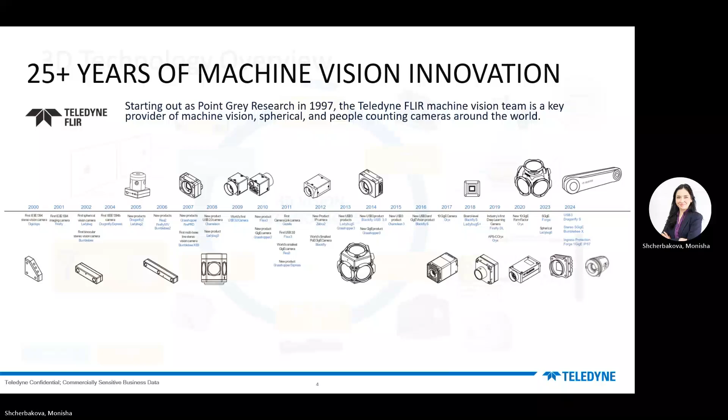There are several different types of 3D vision technologies available, and which one you go for will depend on your application needs and conditions. They can be broadly grouped into two categories: passive and active stereo. Passive stereo uses two standard area scan cameras placed at a certain distance apart, and the concept of parallax and disparity is used to calculate the depth of the object.

Active stereo has several different forms: laser triangulation, time of flight, structured light, and LiDAR. In laser triangulation, a laser is projected onto the surface of the object, and the image of the laser is projected back on the sensor. The displacement in this image gives us an estimate of the depth of the object.

Time of flight, as the name suggests, calculates the amount of time it takes for a beam of light to strike the object and travel back to the sensor. Structured light cameras use a pattern projected onto the scene and capture this pattern and estimate the depth using the displacement of the pattern, similar to triangulation. LiDAR systems send out multiple pulses of laser onto the scene and use the concept of time of flight to estimate the depth.

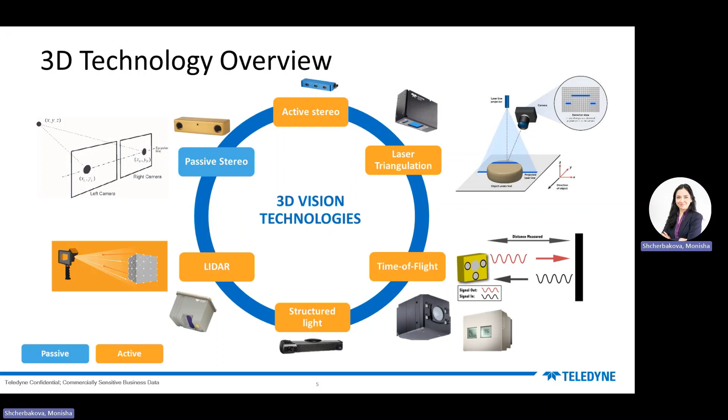So now that we know the different types of 3D vision technologies out there, I want to dive in a bit into why stereo vision specifically is important to certain applications. Passive stereo cameras mimic human vision. Like the human eye, two cameras provide depth perception and spatial awareness, along with contextual information with color and texture.

Passive stereo is also capable of high-accuracy depth measurements using precisely calibrated parameters around many points. Unlike certain types of active stereo, passive stereo is robust to lighting variations, texture patterns, noise, and surface reflections.

With certain high-performance stereo cameras, you can build a real-time system with hardware-accelerated stereo matching suitable for rapid decision-making and responsive control.

The range of distance that a stereo camera can see depends on its baseline, which is the distance between the two cameras. The bigger the distance, the longer the working distance. Using passive stereo, you are able to see over a long range and up to further distances that match human vision.

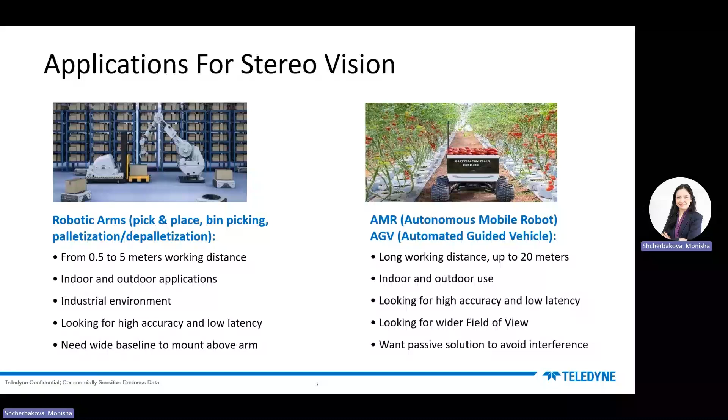As I mentioned on the earlier slide, robotic arms have a few different uses. In bin picking applications, the camera is mounted above and finds the location and position of all the parts in the bin to guide the robotic arm on where to go.

In palletization and depalletization, usually the camera is mounted above and finds the position and the size of the pallet payload to be able to instruct the robot on how to pick up and drop off the pallet.

In pick and place applications, similarly, the camera is mounted above and finds the position and the size of the object to be able to pick it up from one location and place it at another.

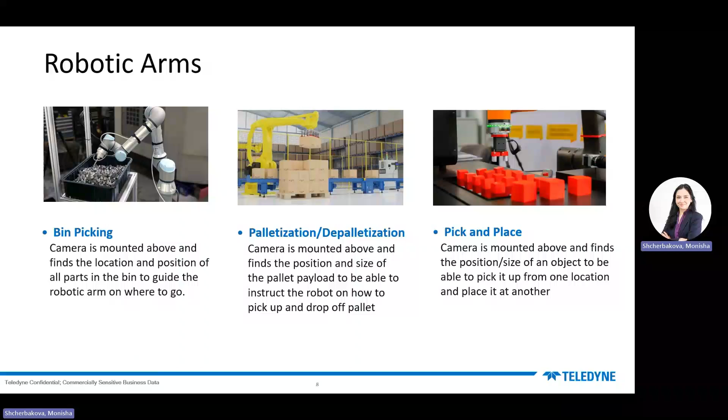In terms of stereo cameras being used on vehicles for navigation, some of the potential applications are autonomous mobile robots, automated guided vehicles, and outdoor robotics.

In AMRs, the camera is mounted to the front or the back of an autonomous robot, normally in combination with safety-rated LiDARs. The stereo camera here is used for context and awareness of obstacles.

In AGVs, similarly to AMRs, the camera is mounted to either the front or the back of the vehicle, but usually these vehicles follow defined paths and just use the stereo for obstacle avoidance or positioning.

In outdoor robotics, the camera is once again mounted either in the front or the back, similar to AMRs and AGVs, and the stereo camera here is used for context and obstacle awareness.

The specialty in outdoor robotics is that the surroundings are unknown and more information needs to be mapped. I will discuss this further in detail in the upcoming slides.

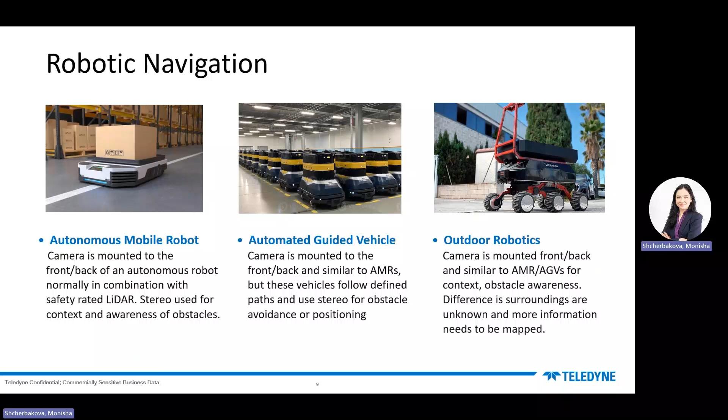There are some other applications of stereo cameras that are really interesting and important to acknowledge. In agricultural applications, the camera is mounted behind on either the tilling or the inspection trailer to measure the size or the shape of the crops.

In surgical navigation, the camera is typically mounted above the patient and used for positioning information with special markers to ensure accurate positioning.

In metrology, the camera is mounted on a robotic arm or fixed above and likely used with a pattern projector for high accuracy measurements.

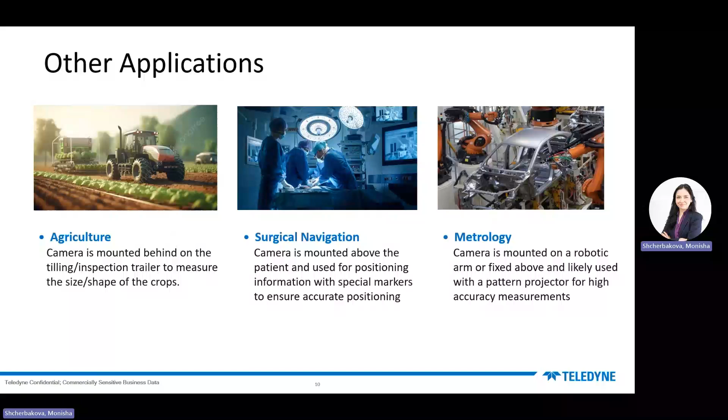Over the next couple of slides, I wanted to dive deeper into a few of the applications I mentioned earlier, mainly palletization, bin picking, and outdoor robotic guidance.

Implementing stereo vision for palletization comes with many challenges, as the field of view has to cover many different angles. Typically, the camera will be mounted on the ceiling with a large baseline so that it can see a large area of the floor. The ceilings in these warehouses tend to be high, so a good wide baseline is crucial.

Picking up and placing boxes accurately and gently requires a very high level of accuracy. Time is money in a lot of logistics applications, so low latency in the vision system is crucial so that the robotic arms perform the palletization and depalletization as soon as possible.

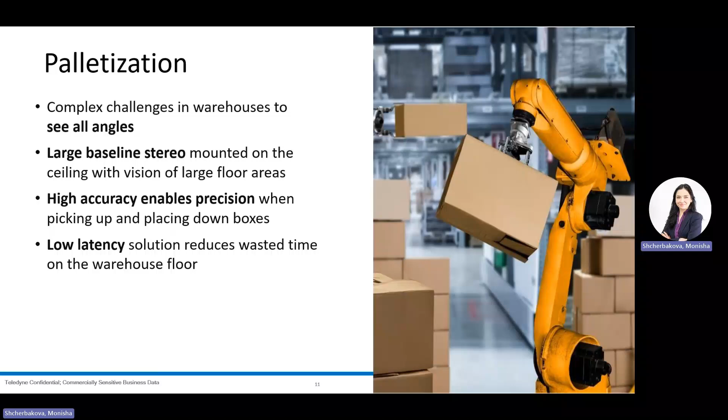The next application I wanted to touch on is bin picking. Typically, the camera is mounted above the bin so that it can see the entire bin. The field of view taken into consideration here will depend on the size of the bin you want to image.

In this application, high accuracy is crucial as the robot needs to be able to pick up the right object from the right bin with good alignment. To minimize the wait time between pickups, low latency is important.

Some bin picking applications, like for package or grocery sorting, might need a color stereo camera, as the color information is used to identify the object to be picked up.

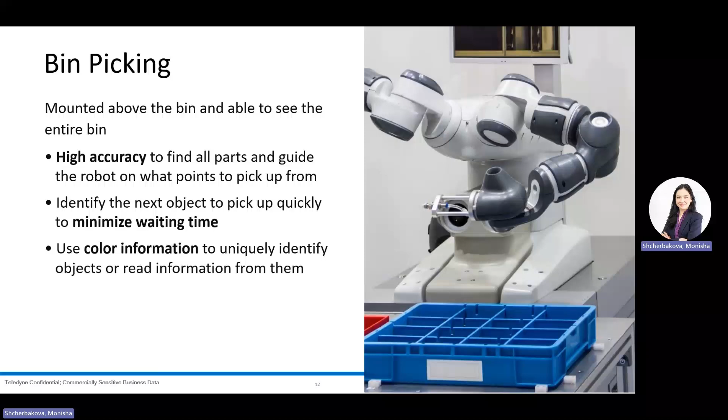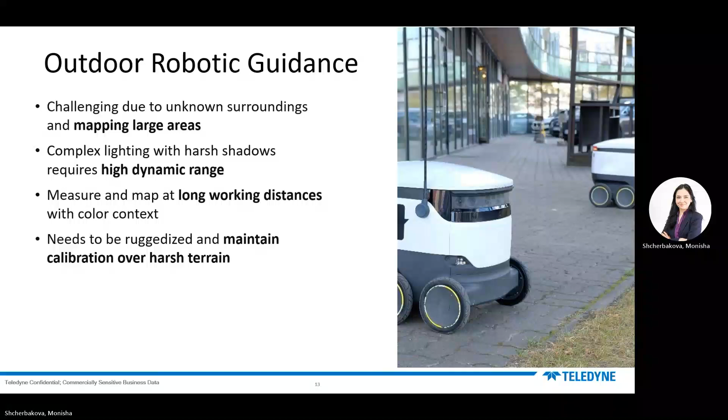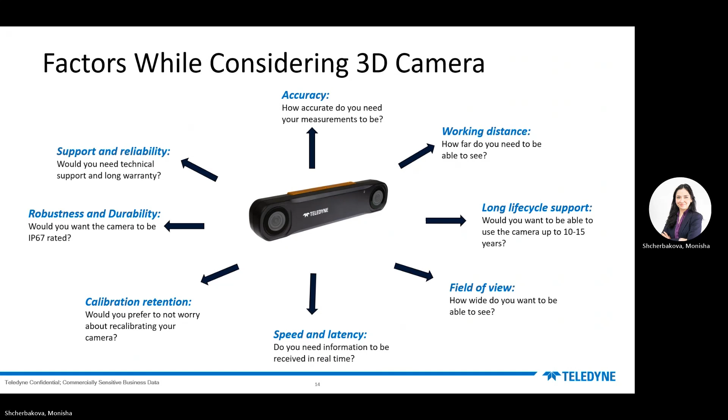I wanted to introduce our new stereo offering, the Bumblebee X, that consolidates all of the factors and the important characteristics that I've outlined in this presentation. The Bumblebee X is an advanced stereo vision solution built on our best-in-class stereo vision portfolio.

This new industrial stereo camera comes with the software Spinnaker that offers a comprehensive solution with onboard processing to build successful systems for warehouse automation, robotics guidance, and logistics. Our team's extensive stereo vision expertise and careful attention to customer insights has informed the design of the hardware, software, and processing at the core of the Bumblebee X.

With high accuracy across a large range of distances, this solution is perfect for factories and warehouses. The Bumblebee X delivers on the essential need for a comprehensive and real-time stereo vision solution. Customers can test and deploy depth sensing systems that work up to ranges of 20 meters with the wide baseline solution. The low latency makes it ideal for real-time applications such as AMRs, AGVs, pick and place, bin picking, and so on.